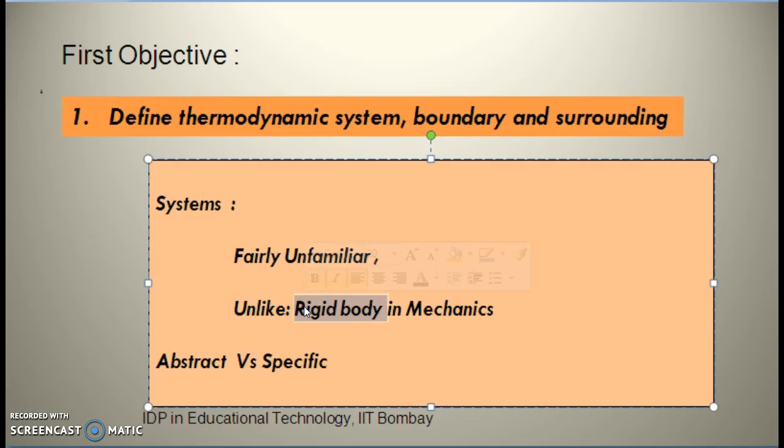Let's quickly get into the first objective: what is a system, what is a boundary and a surrounding? Let's quickly come to the academic definition. A system simply means some portion of the universe that we wish to study. Doesn't make much sense, but that's how it is. Let's try to make it a bit more elaborate. The better way of defining a system from engineering perspective could be a quantity of matter or a region in the space chosen for study.

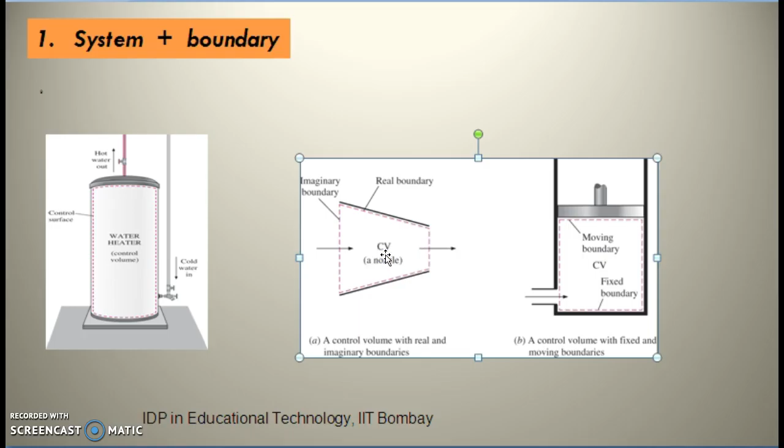We have simply defined a system from academic point of view. That's not enough, because the moment we have defined, some obvious questions come into the mind. When we define a system in terms of some portion, universe, a quantity of matter, a region, space, it doesn't look like we are engineering students. It looks almost like we are dealing with a philosophical subject, and this is something an engineering student is unfamiliar with. Unlike in mechanics, where we take the help of a rigid body, which is something visible, something perceivable.

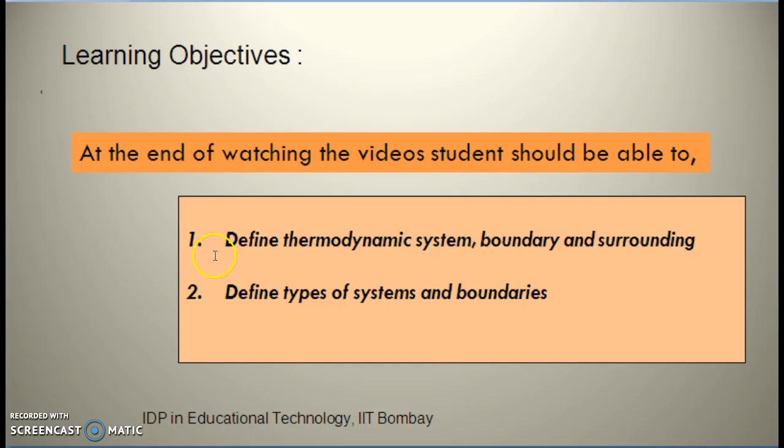Whereas here we deal with abstract terms, like in our academic definition, some portion. Some portion is an abstract term. Universe, a region in the space, a quantity of matter. This all looks quite abstract as against design or other subjects we deal with. And that's exactly how it is, because the scope of thermodynamics is almost universal, unlike design or mechanics or hydraulics. Here we can study anything and everything, and anything we study becomes a system.

So what we study could broadly be either a quantity of mass or a region in the space. A region in the space represents a volume. A quantity of matter represents a mass. Let's take examples: an air conditioning, an aeroplane, a refrigerator system, a power plant, or even a human body, or even a dog or animal, can be a focus of study, which becomes the system. We have understood what is a system.

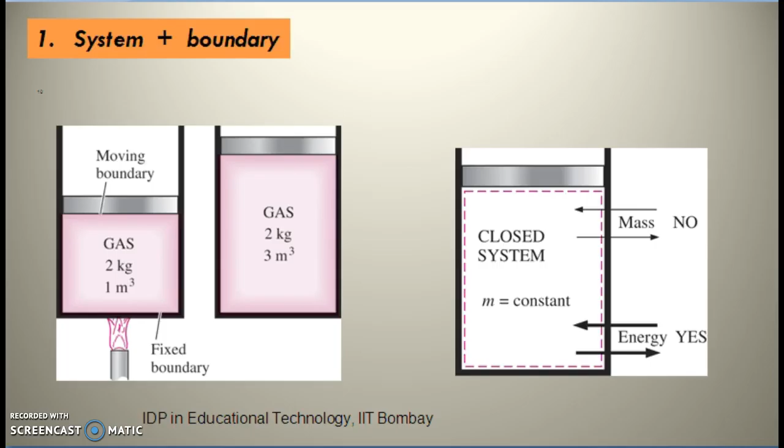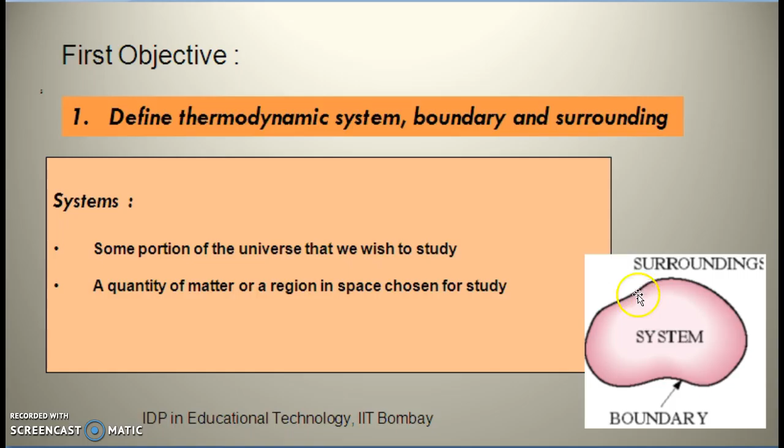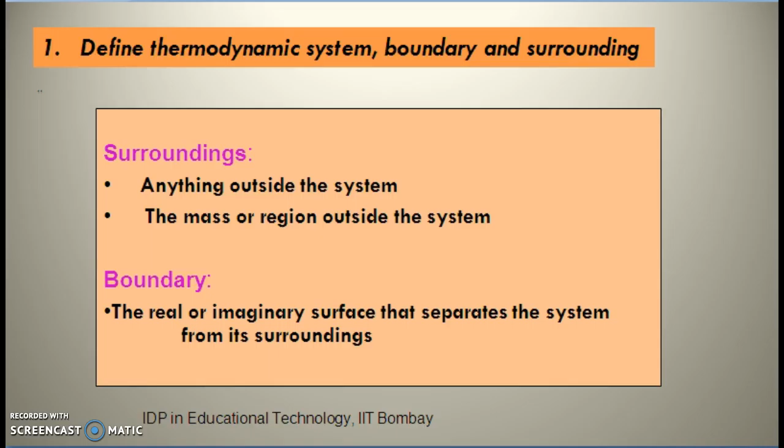Our understanding of systems is incomplete if we do not understand exactly what we are studying. To understand what exactly we are studying in a power plant, we need to put some boundaries. If we do not put the boundary, the question comes, are we studying only the cooling tower? Only the material transactions? Only the exhaust gas? It can be anything depending upon our requirement. What bounds our requirement of study is what we call the boundary. Without the concept of boundary, the system does not become exact. Now let's see the next slide.

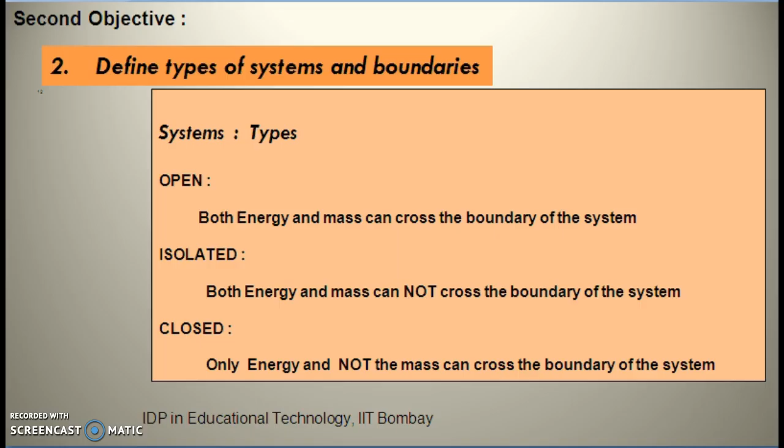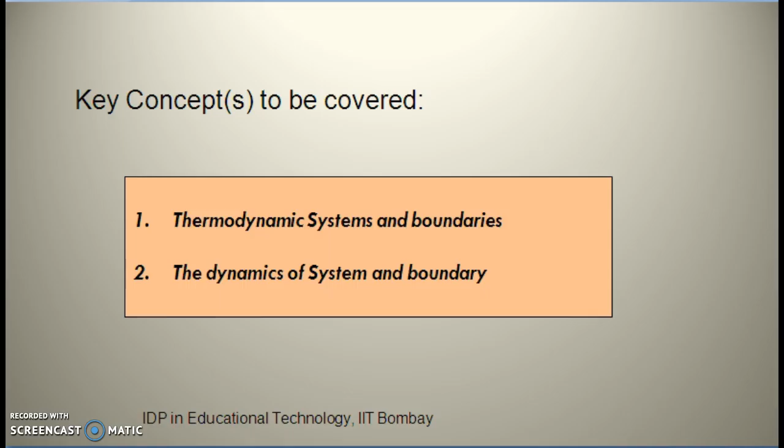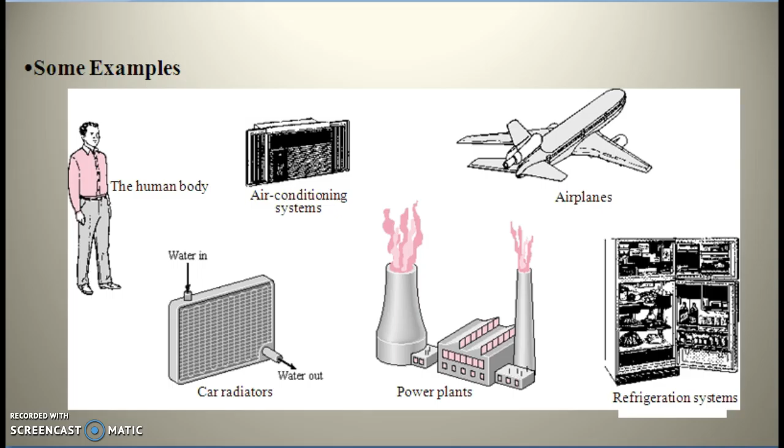You can see here a red dotted line which constitutes a boundary. We are studying only that region, that mass within the boundary. You can appreciate this as a reason for what is in and what is out. A tube, a flow can be infinite unless we put some limit. The limit is imaginary. It can be a fixed quantity of mass like this, or a fixed region in the space. That's exactly how we define a boundary.

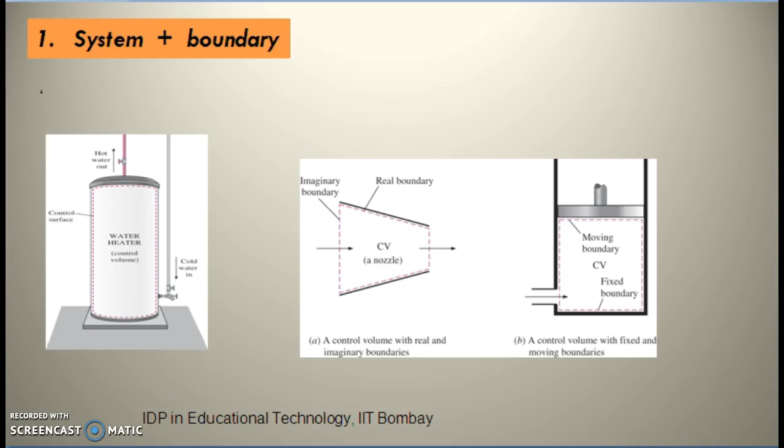Now let's quickly get into the left out part of the first objective, the surroundings and the boundary. Once we have understood what is the system, the concept of the boundary becomes very evident. The system, surrounding and boundary are inseparable. A system cannot be defined without the surrounding, and it cannot be defined without a boundary. System, surrounding and boundary go hand in hand.

So having defined the system as any quantity of matter or region in the space which we want to study, what we want to study is bounded either by a space, a volume, or a matter. We study either a fixed matter or fixed volume. So what differentiates what we want to study from what we do not want to study is exactly the boundary.